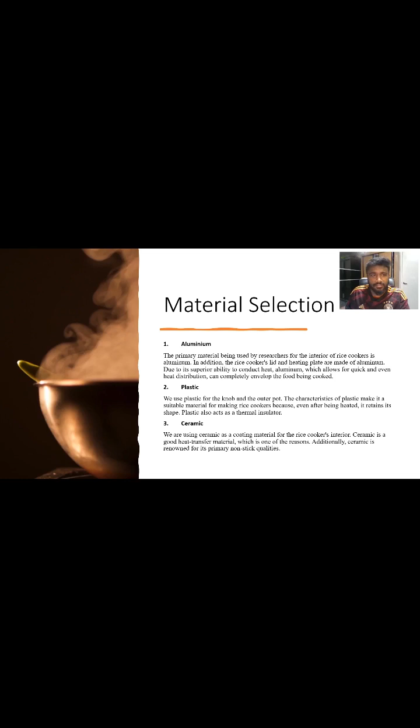The next material selection is the rivet. By inserting the headed pin through holes in the part and forming a second head on the pin's opposing side, rivets are used to join two or more pieces together.

Lastly, let me present on the wire. The electrical component known as wire is what connects the rice cooker to the power source so that it can be turned on, since the rice cooker needs a power supply.

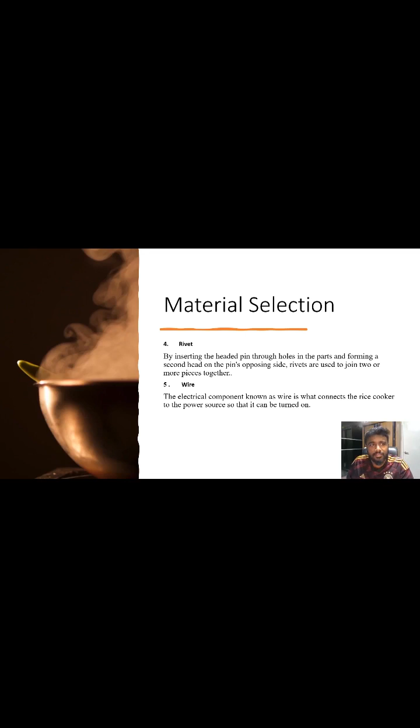Next I'm going to explain the technical drawings. These are the sizes that we have proposed for our rice cooker. Our rice cooker diameter is about 500 mm, and the total height of the rice cooker is 480 mm. In the slide we have shown the front view of our rice cooker.

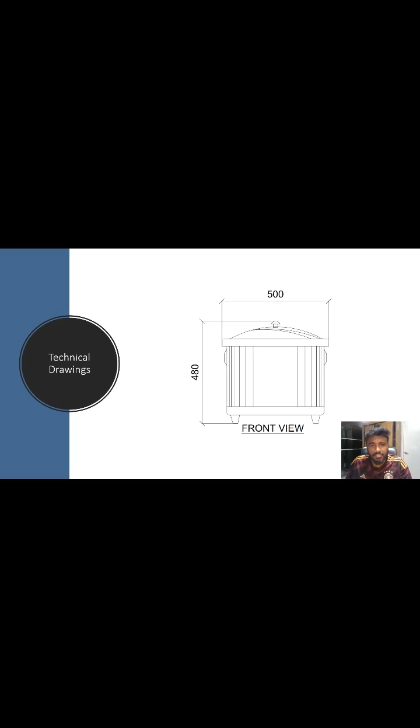As we know, a rice cooker consists of a few main parts. As mentioned in our drawing, there are four main parts. Firstly, the knob and lid, which act as a closer during the cooking of the rice. The second part is the inner pot, where we put the rice to be cooked. Thirdly is the outer pot, which will be made of plastic as well. Lastly is the heating plate, which will be heated and also cook the rice at the same time.

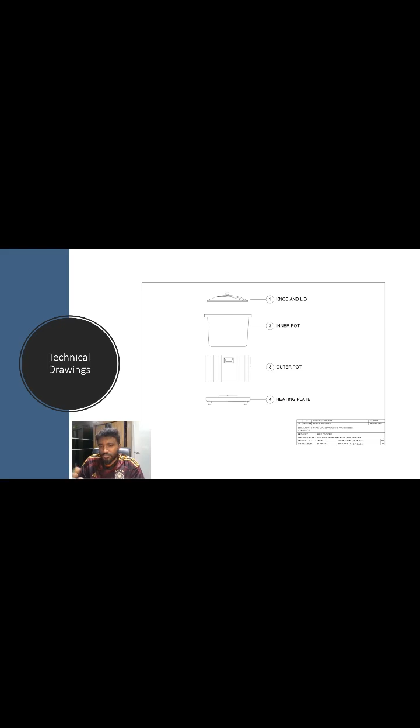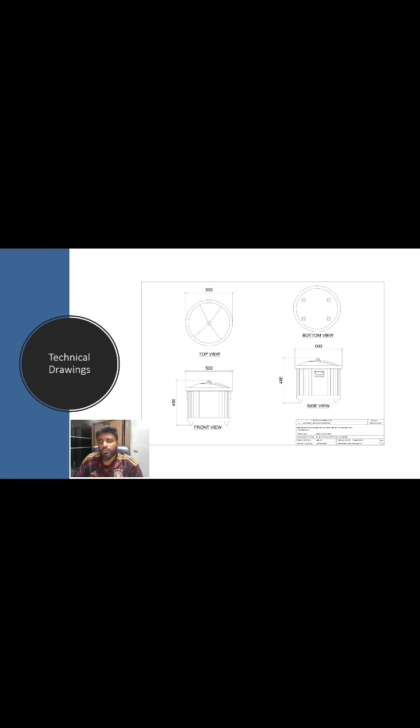Here we have shown the top view, front view, bottom view, and another side view of the rice cooker. To be more precise on the dimension, our rice cooker diameter will be 500 mm, and if you look from the front view, the total height of the rice cooker is 480 mm. This will be the knob and lid assembly drawing.

As we can observe, the knob and lid total diameter will be 422 mm, and the total height will be 94 mm.

This is the technical drawing for the inner pot. From the side view, we can observe that the total height of the inner pot is 348 mm, and the total diameter is 500 mm.

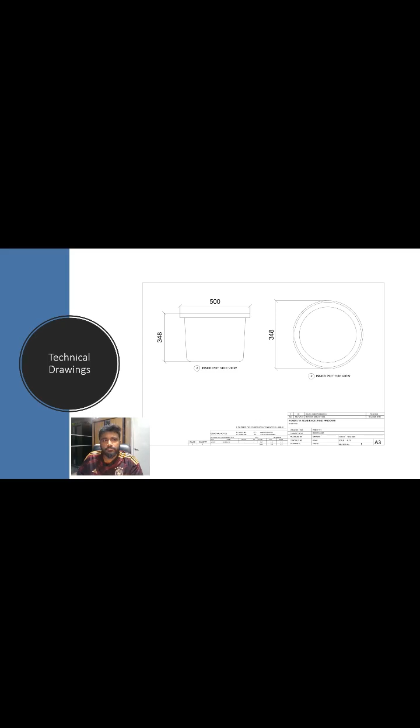This technical drawing mentions the outer pot dimensions. The outer pot total height will be 284 mm, and the total diameter will be 457 mm. This will be the technical drawing for the heating plate, showing the side view and the top view.

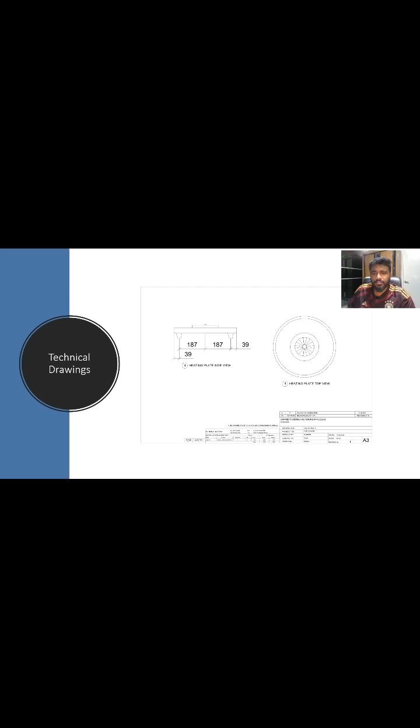Today I would like to continue with the rice cooker assembly method of components. The electrical rice cooker consists of various components that need to be assembled to create a functional product. The following assembly methods are proposed for each component.

First is the outer casing. The outer casing of the rice cooker can be manufactured using injection molding, which allows for high volume production with precise dimensions.

This method ensures consistency in the final product and reduces assembly time. The second one is the inner pot. It can be fabricated using stainless steel, with the assembly process involving welding or riveting techniques. This method provides durability and ensures proper heat distribution for efficient cooking.

The third one is the control panel. It can be assembled using a combination of automated and manual processes. Automated machinery can be utilized for PCB assembly and soldering, while manual labor can be employed for attaching buttons, display, and wiring. The fourth one is the heating element.

The heating element can be integrated into the inner pot through spot welding or a clamping mechanism. This ensures secure attachment and optimal heat transfer.

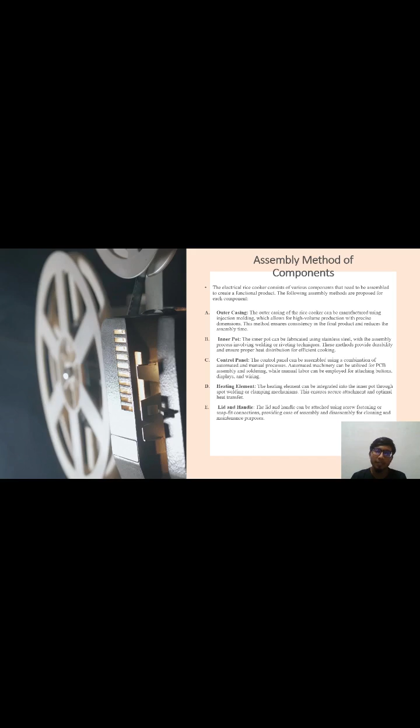The final one is the lid and handle. These can be attached using screw fastening or snap fit connection, providing ease of assembly and disassembly for cleaning and maintenance purposes.

Production process: first is the metal casting process. Gravity die metal casting is used to make the inner pot of the rice cooker, in which molten aluminium is poured into the mold and left for several minutes until it's cooled down, then the product is taken out from the die.

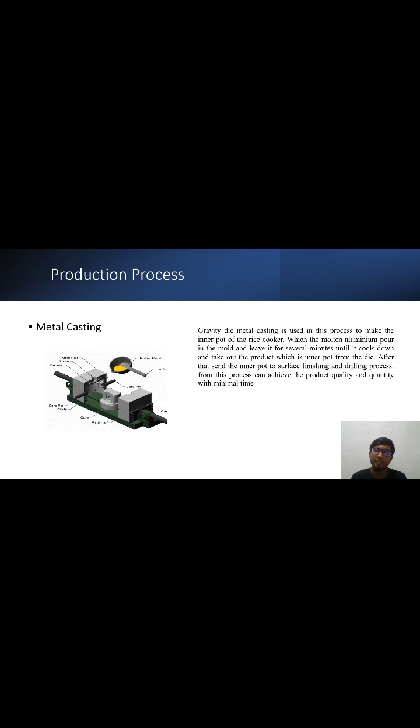After that, the inner pot is sent to surface finishing and drilling process. This process can achieve the required product quality and quantity with minimal time.

The second production process is the polymer process. Injection molding is used to make the outer pot and the knob of the rice cooker. In this process, the mold is clamped and heated until it reaches the design temperature, and the polymer is put in the hopper to melt.

Then the screw forces the melted polymer through the nozzle into the mold. After the mold cools down, it is unclamped and the molding is taken out, then sent for the joining process.

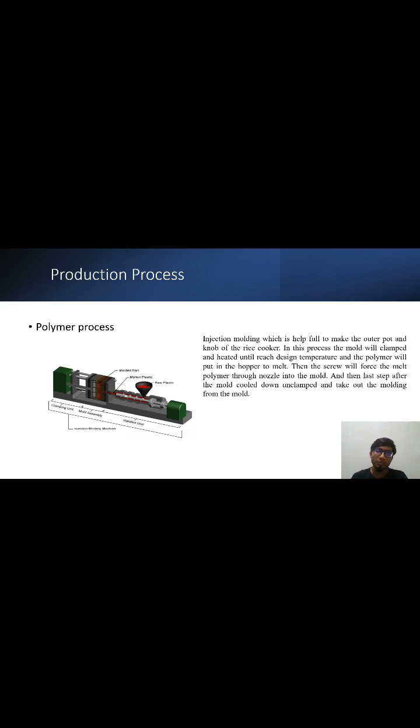The third process is the joining process. An automated rivet machine is used to join the outer pot and the knob of the rice cooker. The knob and outer pot are placed together in the rivet machine.

The machine will insert the rivet and compress it until the parts join together, and finally cut the excess part of the rivet before sending it to the assembling process.

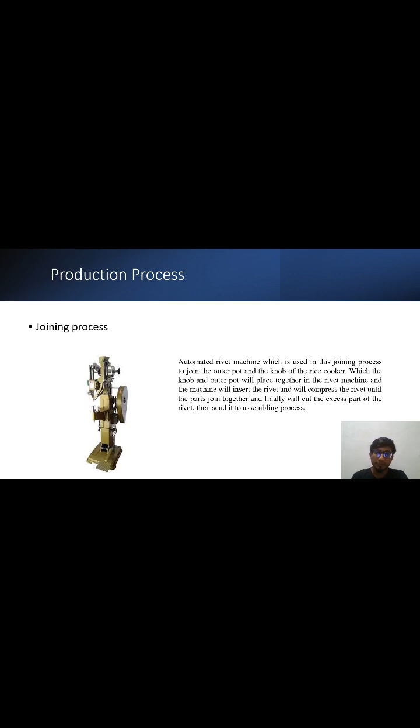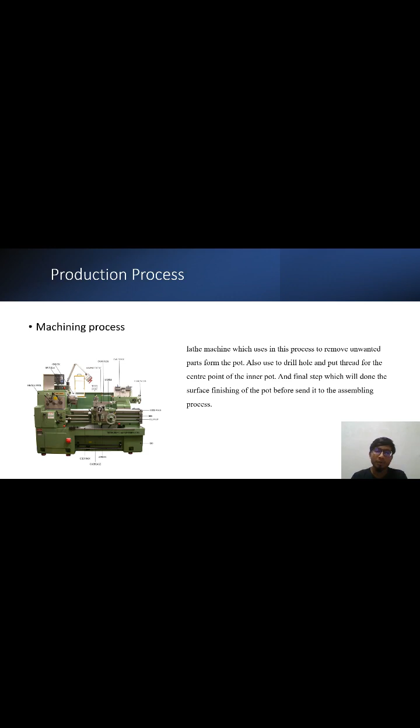The fourth production process is the machining process, in which a lathe machine is used to remove unwanted parts from the pot, also used to drill holes and put thread at the center point of the inner pot. Finally, surface finishing of the pot is done before sending it to the assembling process.

From this onward, I'm going to present about the process stages. This report includes three types of process stages. The first one is the inner pot, which has nine processes.

The first process is raw material storage, and the second is we melt the aluminum inside the furnace. Once done, the third step is on top of the mold, we pour the melted aluminum. This process is called metal casting, followed by removing the mold as it cools and becomes solid.

We remove it from the mold once the mold becomes solid. Once done, the part is mounted on the computer controlled lathe, and we forward this to the lathe machine.

Once done, we use the automated drilling device on the pot, and put 18 holes at the bottom of the solid piece. The holes in the outer pot are used to attach the painted steel shell of the rice cooker and the heating element.

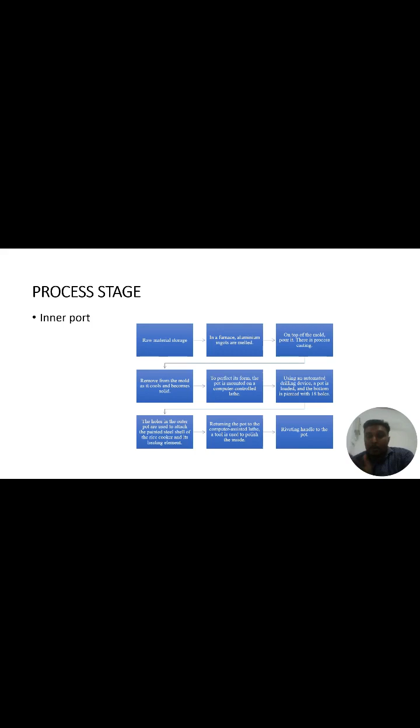The next part is the outer jacket of the pot and also the heating element or heating plate. The first step is the steel body of the rice cooker is painted in an automated booth, then the shell bakes for 15 minutes in the oven.

And then the shell will be baked around 15 minutes in the oven, followed by the company logo imprinted onto the shell of the pot. So we will print the company logo at the outer shell of the pot.

And then followed by attaching the steel shell into the heating element slot and securing with a few screws and connection plate. Then there is a porcelain plate with a magnetic core into it, and we will attach a porcelain plate into the outer jacket.

Okay, and then we will insert the thermal insulation sheet attached after the power cord is connected. The fuse is fastened, so we will insert a thermal insulation onto it.

Followed by, the base of the outer pot is attached to the painted steel shell, and then the heating plate is screwed to each connection plate. The last step is a porcelain plate with a magnetic core on it, which we insert into the magnetic core. These are the processes for the outer jacket and the heating plate.

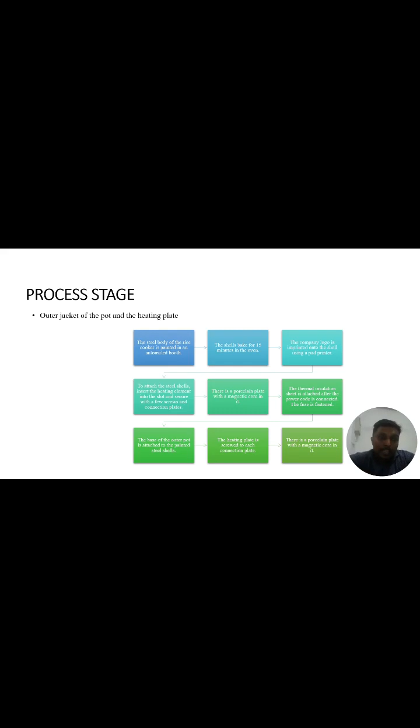And then the last process stage is knob or lid. This will be the last process, where a punching machine will punch the lid shape out of the stainless steel sheet, then create a surface with an even edge and smooth finish.

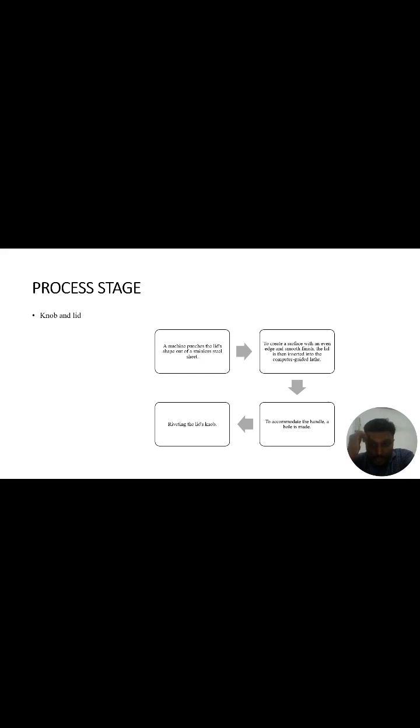The lid is then inserted into the computer guided lathe process. So we will polish the lid to a smooth surface, and then insert it into the CNC lathe machine.

Okay, and then the third part is to accommodate the handle, a hole is made. So we will make a hole to insert the handle into the outer surface of the rice cooker, and then the last part is riveting the lid. So these are the three process stages we'll encounter in our project.

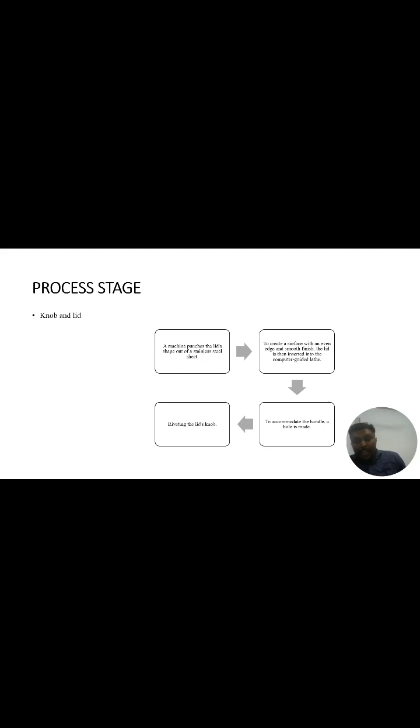Thank you. Hello, my name is Karukai Athanasius Dinesh Jacob from Group 2. I will be explaining the type of manufacturing system of our product, which is the rice cooker.

It is recommended to employ a mixed manufacturing system that combines elements of batch production and job shop or job production for our electrical rice cooker manufacturing. The reason is that batch production allows economies of scale, as it involves manufacturing a predetermined quantity of similar rice cookers before moving to the next batch. This method is suitable for components such as the outer casing, the inner pot, and the control panel, where high volume of production can be achieved with consistent quality.

Okay, the next one will be job production. Why job production? Well, it is well suited to components that require customization or have low demand. Usually for job production we need a very skillful person to produce this electrical rice cooker. This includes the lid and the handle, where individual attention and customization might be needed based on specified design requirements or customer preference.